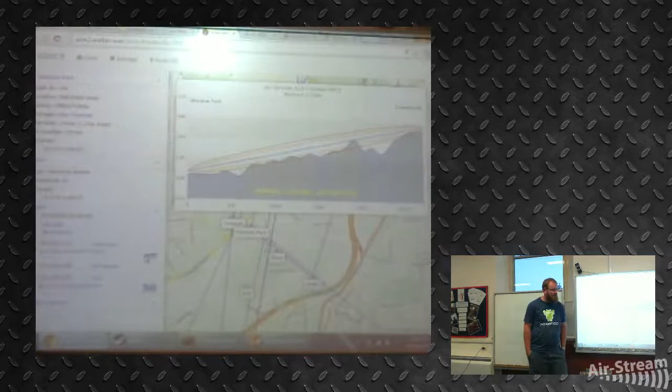So Cement Hill, we've been having a few issues there with a couple of the rockets for quite a while now, so we re-terminated two cables up the top of the tower. Found it's definitely not the cable on one of them - looks like the actual isolation transformer cooked itself in the rocket, but bench testing will confirm that. So we've got another one to swap in there.

What are we looking at? That's Cement Hill, up on top of the hill. Awesome view. How's that link, Hank?

How's that link there? It's not putting my spot - I've got a Lonsdale. This is just some redundant line someone drew in there, never mind that. Looks like you've got line of sight though, Justin, but it's not putting mast height in either. Signal's not that strong, not great. Sorry mate, it's rough.

Are you sure? How dare you do that. Bug report - done. Where's the bug report? I sent you an email.

So it's literally Shadows - Tony's all of about 400 metres from it, he'll have good fun there. And the link to Lonsdale from Cement Hill - still good quality? Yeah, no plane issues, good.

So that's what's happened in the last 2 days. The plan at the moment is to head back to Cement Hill on Monday to swap out that rocket, and that should get our northern 2 gigahertz coverage running properly again.

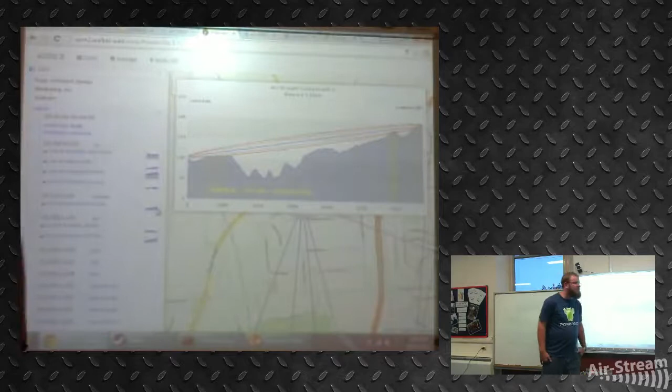What's our Cement Hill link there? The NRC is a good one because it's like 6 metres from the ground when it should be 45. But yeah, that's those ones - awesome, that's a good link.

It's a volcano at the moment - yeah, the lava flowing out.

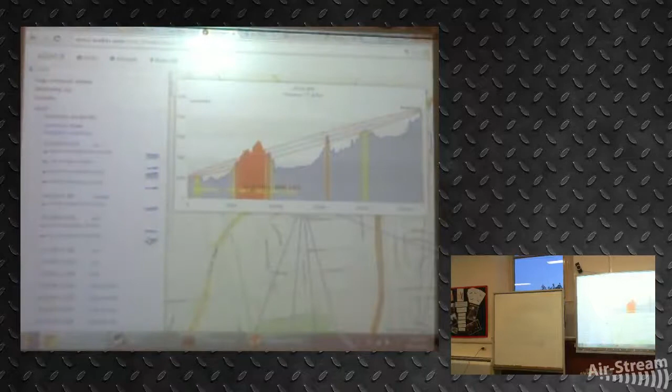Oh okay, so Cement Hill, that's the other one I forgot about - one of the guy wires snapped, and it actually corroded off on the cable.

Can you see that, Sean? Does that come out? Yeah, so the guy wires there use a product called the Anchor Lock Duckbill, and the ones we installed were recommended for the application. However, we grossly underestimated the salinity of the soil there, and 8mm galvanised wire rope has just corroded straight through in 2.5 years - that's why it snapped off. So we're down to 5 wires on that tower now.

That's Cement Hill there. It's mildly awkward to climb when it's on its side like that. But could be easy. What are we looking at? That looks like fibre, doesn't it?

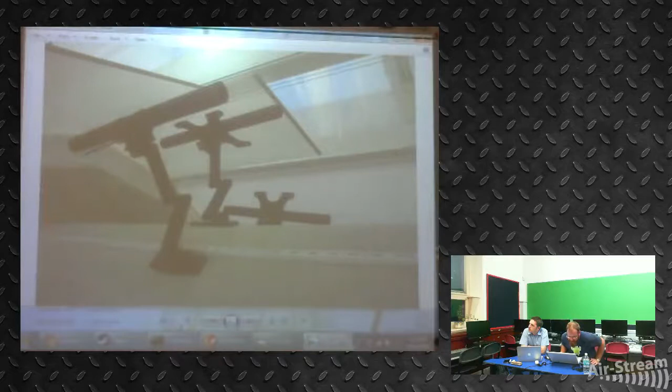Not this, this isn't cement. I'm assuming this is Tonsley. Oh I see, you can rotate it. I don't know how to use these computers.

They've got these things everywhere, they're television mounts, which is fine. It's got like a plastic thing on it. That's all related to where they are. You can put a little board here for us to put gear on, and it's all in the corner, so there's people working here.

So again, for access, it's really good. There's not really a photo I can show you that'll show you line of sight around the building without doing this. Where's that building? This is the Tonsley building.

And that's the network room too, which is great because we've got access to it and a whole bunch of stuff there. That's also probably in the room. So that's all ours, or access for our gear.

You can see where everything's got a sticker on it, that means you can use it. They're going to be using it for their experiments as well, they've got plans for doing 1 gig stuff and whatever. They've already asked us for assistance with that, and I said yeah, there's going to be somebody in the club who'll be able to help you.

So I think it's Bedford Park, Chris, is it? Or that building over here, I didn't know quite where it was. That's still more elevated than I thought. That's like the 4th story, so you can still see pretty good coverage there.

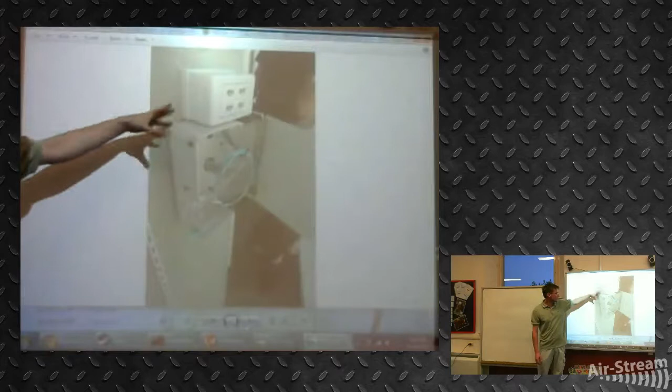Not a picture though. So that's what he's given us there, for like on every floor, and there's 11 of them. There's like a lot. Wow.

So if you look at that and go, how much money is that - we feel pretty lucky to get anything this good. It's good, not having to do any infrastructure or any of that Highgate Park drama we had.

No, you don't have... yeah, I see. Yeah, cabling between the two. Go to the next... sweet, go to the next picture.

Oh yeah, those are concrete, aren't they? Yeah, they're all solid, so that's what holds the building up. They're right through. But like I said, they're distributed not evenly - there'll be like 3 on the 4th floor and then 5 on the other floor.

So it's not like an EARC setup where we've got one floor that's all ours, and we can put wherever we want, 360. It's more scattered where he has control, which is better for us because it means we go, hey Paul, we're having problems with number 10.

He's like, yeah no worries, just give us a call. Having that sort of accessibility is great because then we don't have to get access to the roof and all that. It's also got greater separation. We're not going to be using every one of them.

They're going to be doing their stuff as well - they want to do testing with lasers and all sorts of shit. Use the same frequency on the opposite side of the building then? Well, that'd be the great thing, wouldn't it?

If you can use one channel for all the sectors, it'd be great, but I don't know what they've got at EARC. I think we don't have that. Yeah, but it's good.

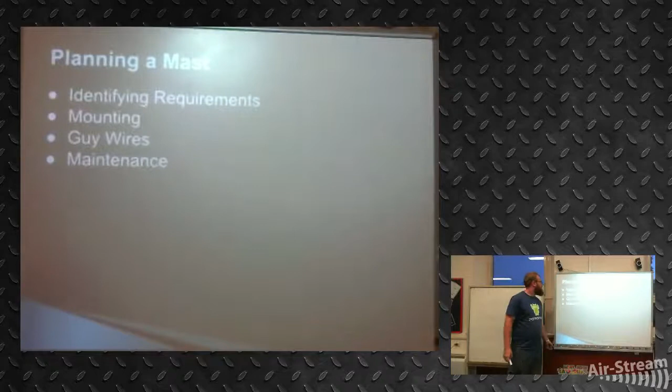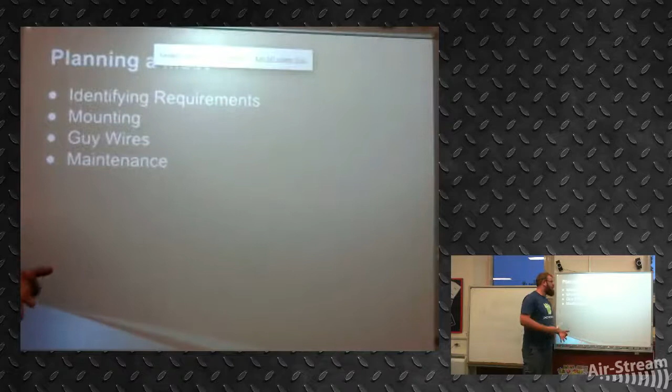So basically what I was going to have a bit of chat about tonight was planning a mast, building a mast, and things you probably should think about when doing a mast. My main points are going to be identifying requirements, mounting, guy wires, and ongoing maintenance. A couple of these things we do without thinking, some of the other ones generally get forgotten.

If we go to the next slide. And it's safe to say, if you want to be on a network team, you need to know this kind of stuff as well. Not to mention doing your own builds. Yeah, it's something every member should know, is how to plan and build a mast properly.

So identifying requirements. This is something that most of these points that I've got up here, we do without thinking, some of which often get overlooked. So: load requirements, accessibility, wind and exposure of the mast, existing infrastructure that you've got to work around, and visual requirements, which is becoming more and more important when planning masts, so the council doesn't send us an angry letter.

I'm going to start off with load requirements and wind and exposure, because it's something that I've done wrong myself. I've broken masts. If it's possible to destroy a mast in a certain way, I've probably done it. Not the best way to learn, but it is a way to learn.

One thing that we're all very good at doing is overloading masts. When planning our builds, the first thing we should be thinking about is how much gear do we want to put up there? How much gear could we possibly want to fiddle with? Are we going to put other things on the mast, like a TV aerial, or a satellite dish hanging off the side? Do we want to put a wind turbine on there as well? Who knows? So load requirements are very important.

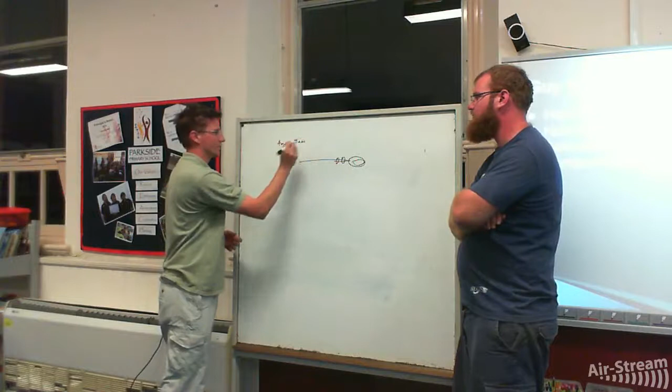A lot of the builds we do, we don't need excessive amounts, and we normally use about 4 to 5 mil rope, which has an FSWR. Yes, we could do FSWR, but that's a whole other theory. The breaking strain of this is fairly high, like it's pretty good stuff - 3 ton or something. So majority of my builds I usually use 4 mil, mainly because it's cost effective - that's the right stuff to use for the job.

The other side of it is if you go too big, you're not going to get the tension on it to keep it straight - it's going to be sagging. So no mast that we'd ever build, you'd never put 10 mil rope on it. It's just silly, it's going to cost you an absolute fortune.

Even the 50 metre masts don't use 10 mil rope - they just use lots of rope. And they work on redundancy, so if we lose 3 wires, will the mast fall over? Right, good, let's double it over again - which gets back to my point that your mast should be able to stand up without wires.

So you've got a couple of parts to the guide wires - I call them guide wires, people call them guy wires, whatever it's called. You've pretty much got your rope, which will come down from your mast. Sorry if I'm going a little bit - I haven't really rehearsed this or anything, but I've just done it 100 times.

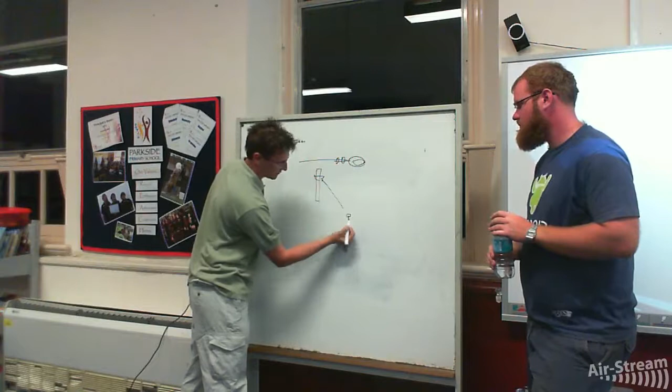You've got your fixed point wherever you're attaching it to - could be the roof, could be a chimney or a tree. I highly recommend not a chimney or a tree - yeah, it's bad, the trees let go. Sometimes you can use them, so chimneys... yeah, so you've got guide wire that goes into.

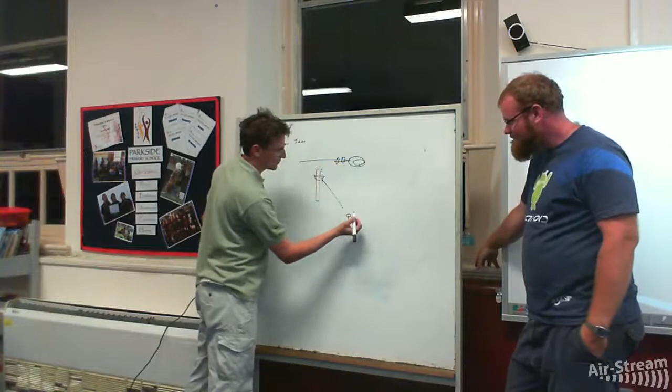So you've got, I'll say I use a piece like what we used on Shoto Park - a piece of angle iron, bolted to the roof, straight into a beam or something, is always a really nice option. It's got a nice D-shackle on it, which means the wire will give you a bit of movement as well, and it's very easy to take off.

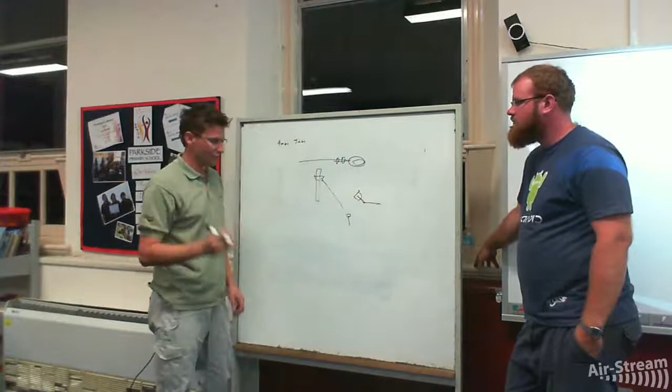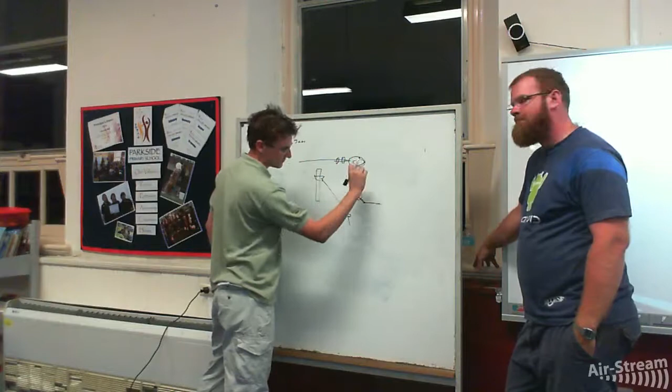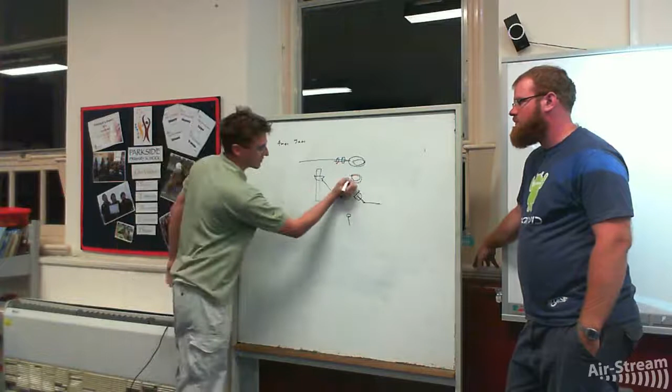And then you've got your eye, and then you've got your thimble inside it, which pretty much keeps the form of the wire regardless of whether it gets tension, and also it's a visual indicator - when you look at it you can see if it's moved, if the thimble has moved in the mount, you can tell if the mast has loosened off.

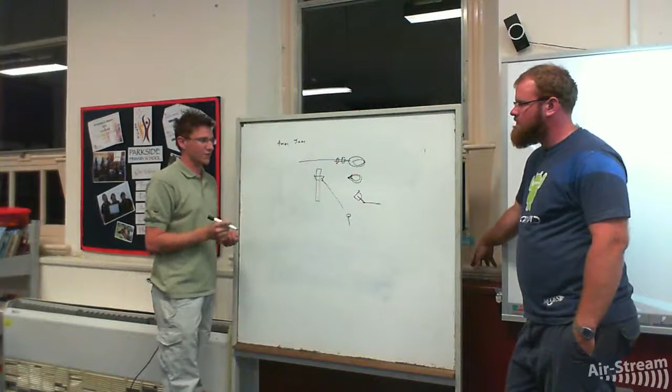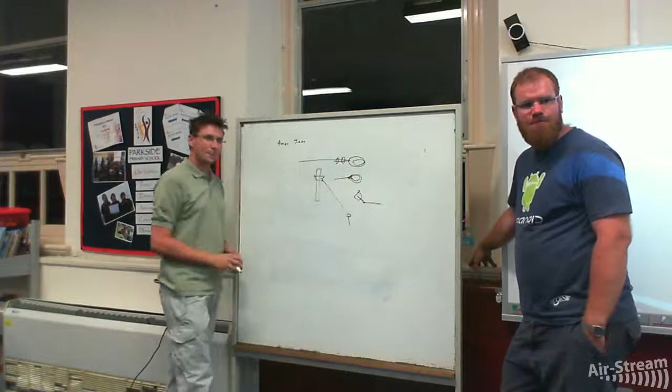So it's also really good, especially with the wire rope we're using - it's not very thick, so it has a tendency to bird cage and even break. So it's always a good idea to put a thimble in. It also keeps a nice curve on the wire, so you don't have a sharp edge where you're attaching it, catching all over your hands. And if you need to adjust the wire later, a sharp edge will wear through it quicker.

So you've got the eye, and then you've also got your turnbuckle, which is a bit like this. There are a couple of different ways of attaching to turnbuckles. Some people like to go directly onto the turnbuckle, putting the thimble through it and attaching like that. Personally, I like to use a D-shackle, but it's each to their own.

What I usually do is wind these right out - go all the way out until you can literally see a little bit of thread sticking out, probably only one or two. If you've got M8s or M6s, there's plenty of thread on there for whatever you're going to do.

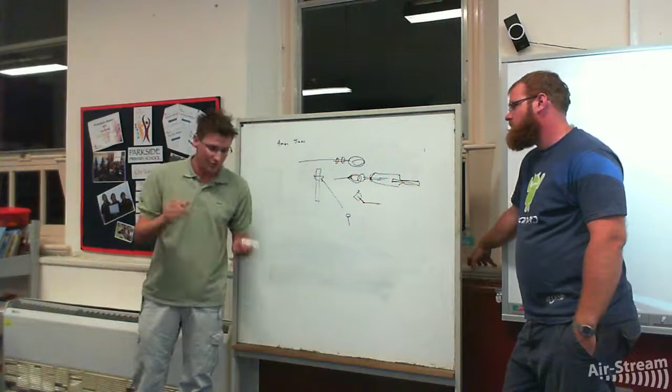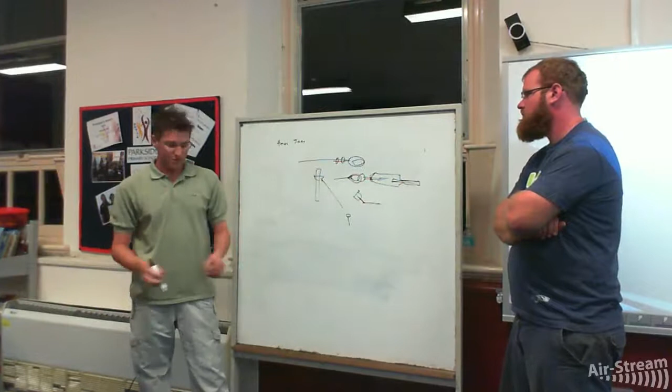That means when you've got your wire there, you know where they're all set to, and when you start turning you've got a lot of movement, so you can go 'oh shit, we really stuffed this up, I've got to pull this one in and this one can stay out' or whatever. You get yourself a lot of movement, and right at the end when I'm finished, I'll use a spanner and just put a couple of turns on it, and it will not move. You can go up there in 2 months' time and check it again - that's the whole rule of thumb for how tight it needs to be. You'll pick that up from other members and stuff.

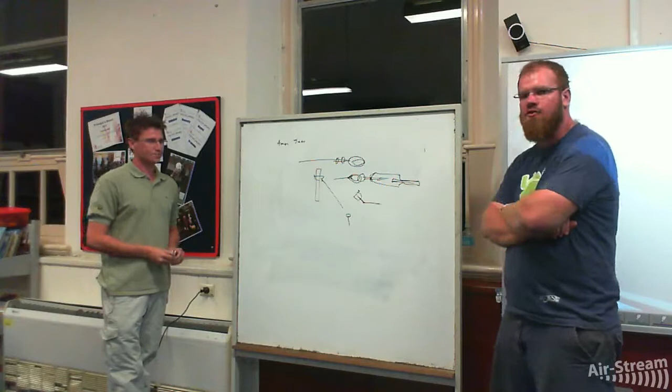Everyone's got their own take on how that should be. Personally, it depends on what you've got up there - some sites you want a little bit of movement, depending on what's there, how many wires and how many sets you've got and everything.

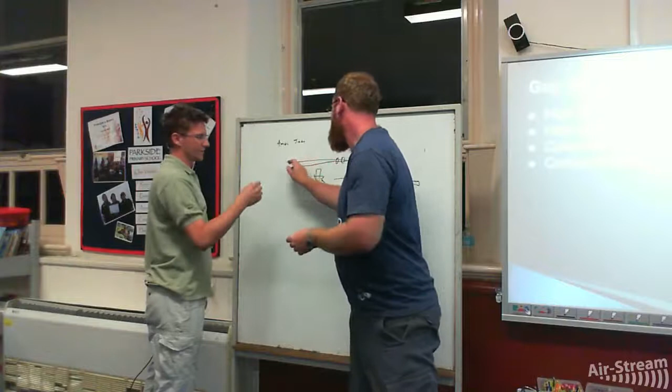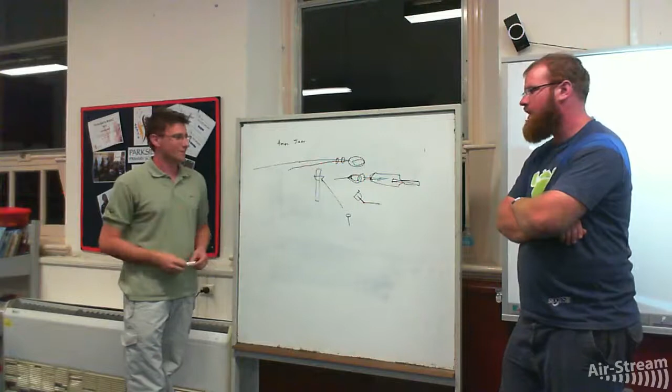Next, moving on to this - these are your wire rope grips. We normally use, you really should use two. I've seen sites where they use one, but obviously the second one's there for redundancy. It's designed so that it doesn't slip - the wire's... if you read the Hills manual, they'll tell you to use two.

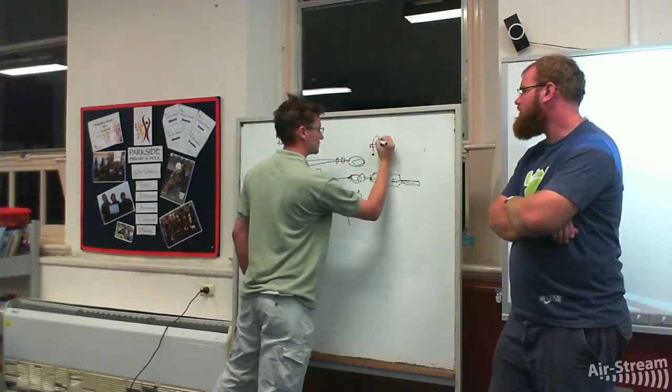It's a little bit like this - it looks a little bit like a tiny U-bolt, with a nice little saddle. I think at Undo we use 3. Yeah, I've used 3 on my tower, I've got 3 on each wire.

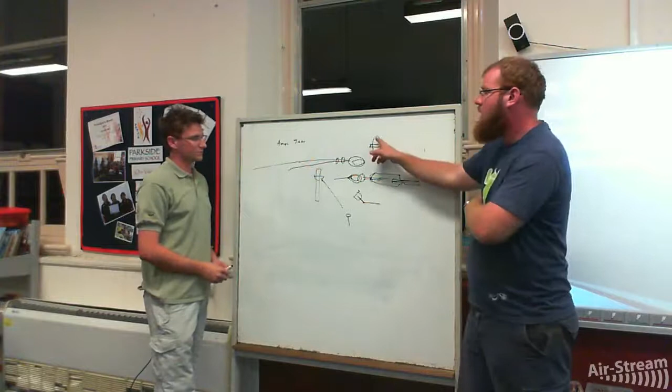Now the other thing, I'll get it backwards - these only go on one way. Are those called D-shackles? No, they're your wire rope grips, and they only go one way. Google it, I don't actually know which way it is - I get it wrong every single time too. I've even seen riggers at my job, riggers more senior than me, flip them the opposite way, so it's sort of one way or the other.

Yeah, they're doing different things than us, but they know better than what I do. But what we do here, I would suggest you put them the same way.

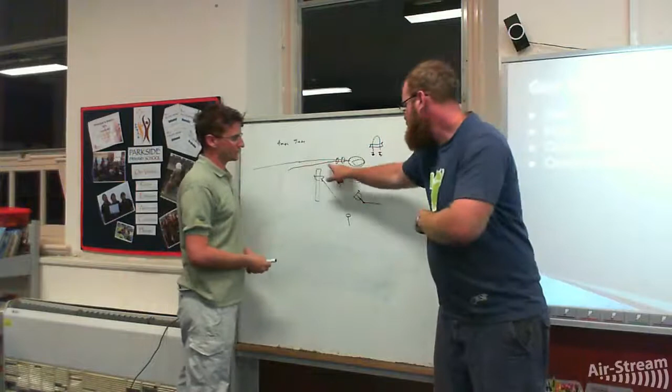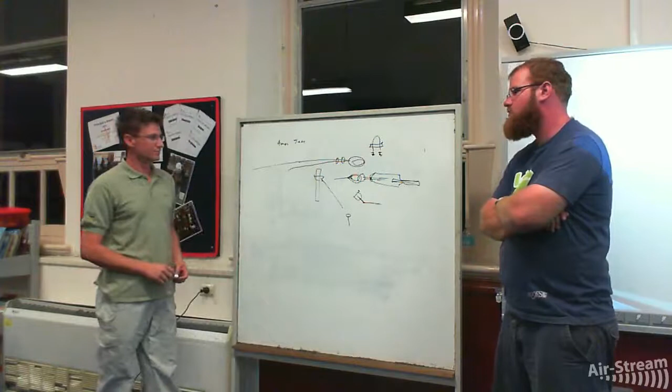Off the top of my head, I'm pretty sure the bolts need to go on this side of the wire. Bolts go on the ends, not clamped down on the spare, not on the ends of the cut. You know you have a short end and a long end, so your bolts are here, and this is the extra part.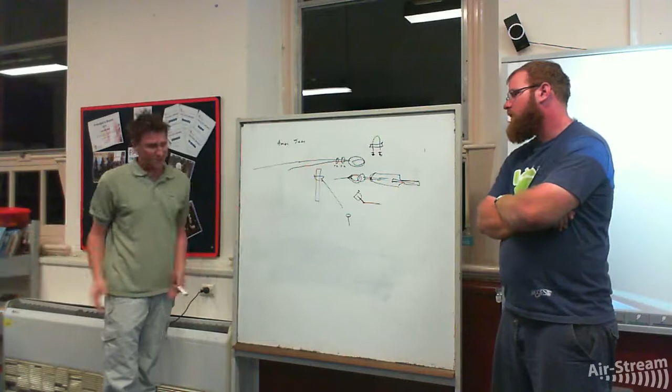I always give myself, if this is the bottom part of the wire rope, at least a couple of turns extra. You've got your 2 meters there, it's not really necessary to cut it, if you need to change it later or have to change the position of the collar.

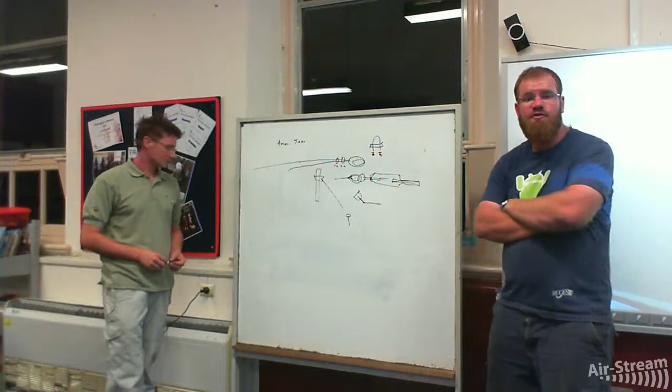It'll come back to bite you on some sites where you can't do that, especially if the visual side of it matters. If it's going to be in full view of the world, they don't want a nice big coil of wire rope there. Make sure you've got at least half a metre extra.

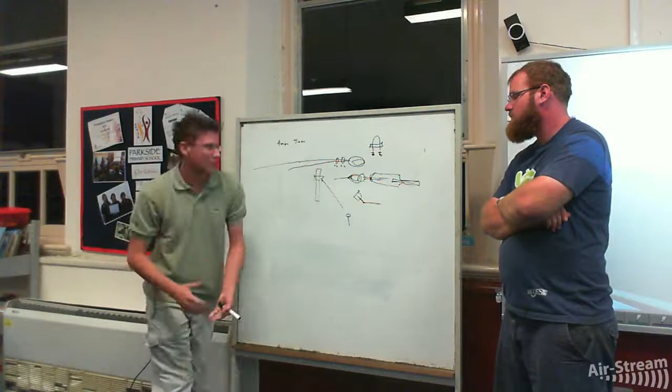It also helps if you need to reset the wire - if something's happened, you've got something to grab hold of. Someone with gloves has a metre to pull up, or someone else is tightening it, so you haven't got this little section where you're trying to hold it and do all sorts of things on a roof, where things can go wrong. So it's always good to leave yourself a little bit.

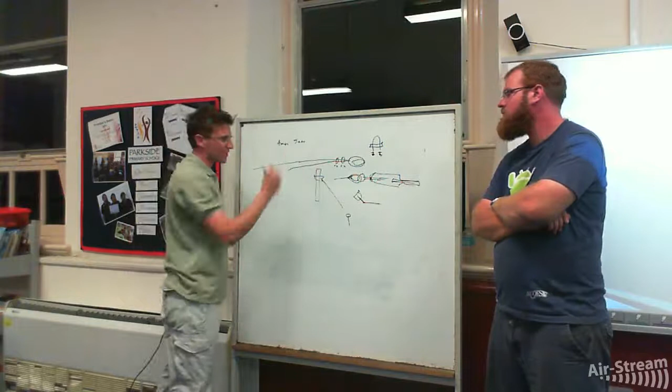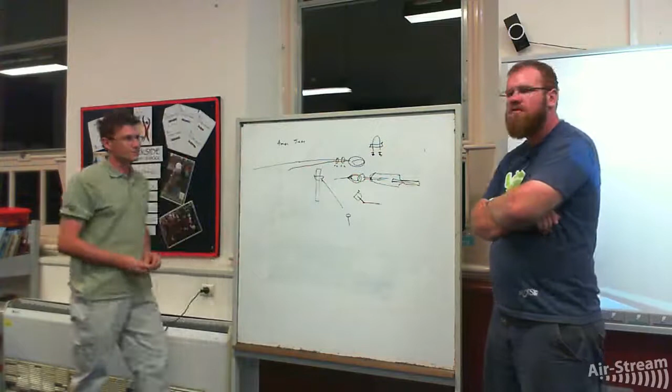Just tape it up, put a cable tie on it, so it's there, ready to go if you need to move it. Like I said, measure twice, always cut extra, always cover these two. It's not expensive, at 30 to 60 cents a metre, just chuck in extra - you've already come that far, so the last thing you want to do is go down to Hills or Nobles and grab more.

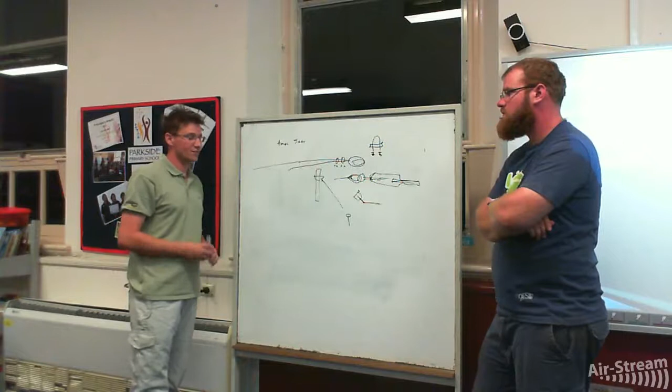That's just annoying. I really suggest everyone not go to Bunnings. You will get shafted on price, and they don't always have the right stuff. The majority of the gear they've got at Bunnings is not rated for lifting - we're not really lifting, but we are working with the same sort of weights.

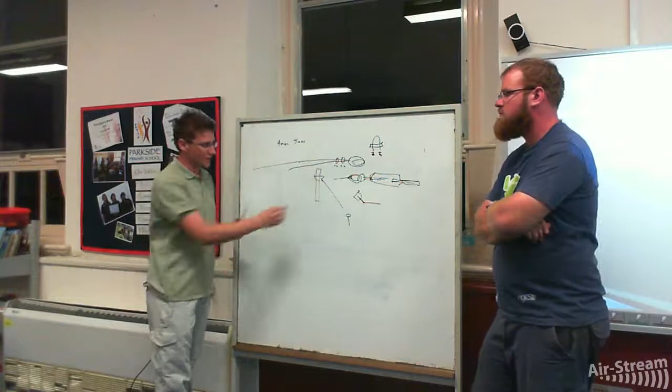As Nick said, quality of the components as well - generally your wire rope grips are a lower quality, and the D-shackles and the stuff they sell is for shade sails and things like that. I'm sure you can tell me stories about someone's shade sail that flipped over. I sleep very well at night knowing that when I do a site, I put the right gear on it and I can go up to the mast and shake the crap out of it and it doesn't move - that's fine, it's not going anywhere.

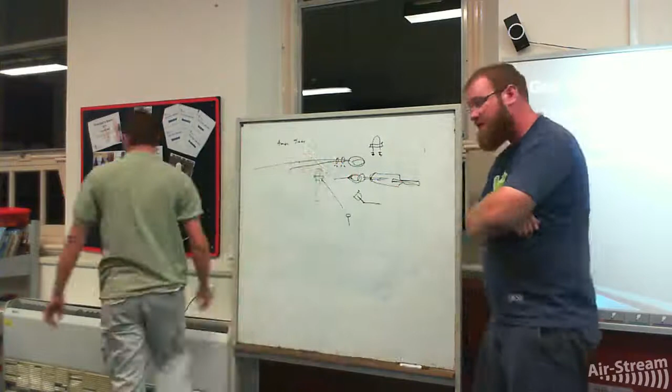Do they do the Ramsey gear? I don't know, because the only thing I buy from Bunnings is aluminium and brackets. I'd go to Capral for that, it's half the price. I just get like a 1.5 metre length for the angle, but it only does half the price.

There's Nobles open - I think they're open Saturday morning, and if not, they open early as well. I think they open at about 7:30. They're on Grand Junction Road, huge big warehouse, shiny, it's blue, it's new.

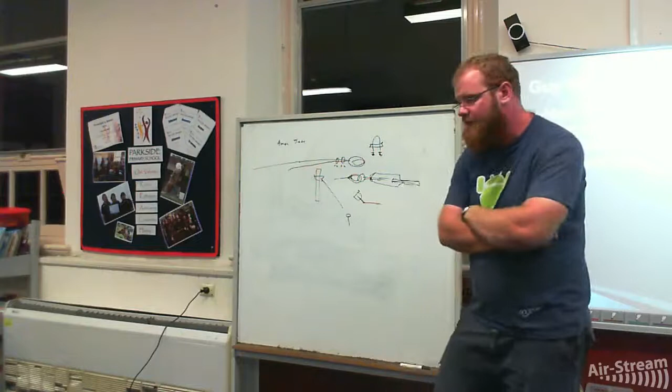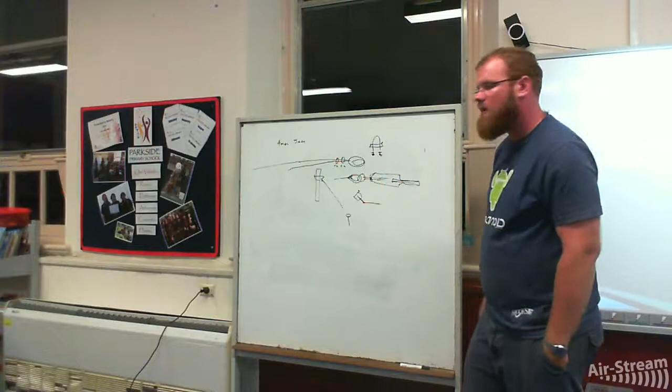So yeah, that's wire ropes. Always buy extras, because I guarantee you the nuts for your thimbles, you're going to lose half of them. You take it off, it falls into a gutter, it falls down a drain, you'll lose bits. Buy extras, they're dirt cheap. You're talking 10 cents each for thimbles like that. With our member discounts, rated D-shackles, M8 D-shackles are about 30 cents each.

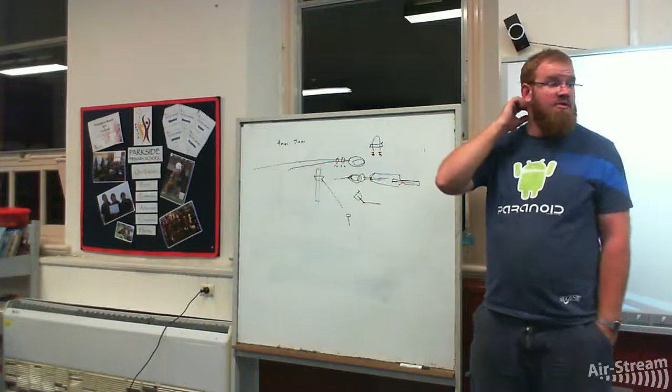Do those have Nylocs? No, they don't have Nylocs. Please get 10 extra, they've got a cast bit on them so they actually bite in. I haven't seen them, I've never put Nyloc on them. Could if you really wanted to. I don't think you need to. I never have.

Yeah, that's it. It's just a pain if you need to reset them. I haven't seen any, I've never seen wire rope grip nuts come loose, not when they've been done up with an actual spanner anyway. If anything, I've seen it lead to a point where you can't undo them. Exactly, they normally corrode up. That's only in extreme cases. They normally corrode up and you can't get them off anyway.

The last pro tip I've got for you, when you cut wire rope, the grinder is a very handy thing. However, put some tape around the rope first, that way you don't get the nice frayed edges and cut the shit out of your hands. Tape it, cut it through the tape. It smells funny, probably don't breathe it, but it's the quickest, easiest, cleanest way to cut wire rope. You're not going to end up stabbing yourself. Leave the tape on there as well.

That's a pro tip. That's one of the life hacks. Yeah, make sure when you cut the wire rope, you cut the bit you meant to cut off, not the wrong side. That's also really annoying.

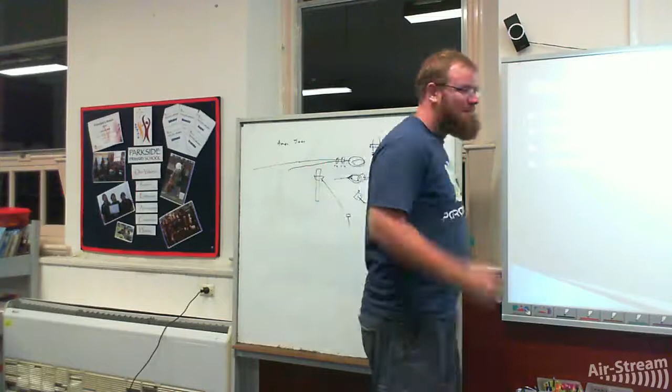Battery powered grinder is your best friend as well, if you've got one. Otherwise a normal grinder. Side cutters, don't do it. If you're rich and doing this all the time, buy wire rope cutters, they're about 60, 70 bucks for a pair. They cut like a hot knife through butter, they're brilliant. They really are. They're razor sharp though, they'll take your finger off.

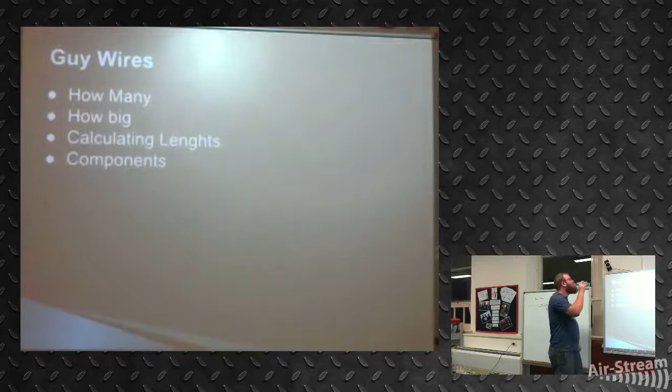Maintenance. This is the one that always gets forgotten. How do we actually access that radio that's died on our mast? Yes, we don't want to admit that things are going to die, but they die. Everything dies eventually, it's a fact of life. Lightning.

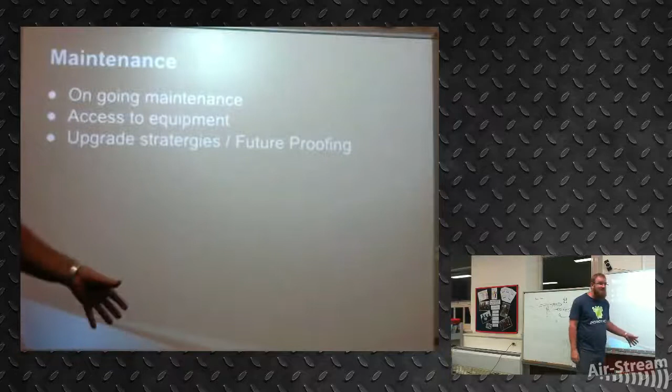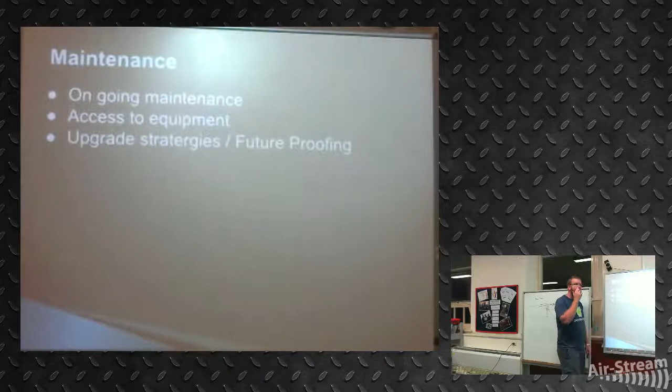Lightning's a fun one. I recently had one of my towers hit by lightning in WA. I had 4 Motorola radios die on that and 1 Ubiquiti radio die on it. The only stuff that survived was Ubiquiti gear, amazingly. None of the $1,000 radios survived. The only way to get up this mast is with a 27 metre EWP, which I had to drive, because they wouldn't give me a low loader, about 8 kilometres, at all of 1 kilometre an hour. It is painful, and every time a vehicle went past I had to pull over.

So, thinking about how you're going to maintain a mast. In this example, if I were to build a new mast at this site, I would put something up that I can tilt over, because it's going to get hit by lightning again. Something I haven't even gone through is lightning protection and all that sort of stuff. We'll make it fun. Yeah, so how are you going to access it?

Larger sites, if you can, climbable masts are really great. They are also really expensive, but they're awesome. Not always practical. Tello masts are probably the most practical one for a client install. So if you're just putting up an Omni and a NanoBridge or a single antenna, a Tello mast is the way to go. They collapse down, you undo the bolts, they come down to about 5 metres, you can access your equipment with an A-frame ladder. Except for in-roof ones. Don't put a Tello mast in your roof. Yeah, don't put a Tello mast on a tile roof, because it'll leak like a sieve. Another one, I know we've all done it before.

We've all done it before, but you should never ever lean a ladder up against a mast. Cook and I have got a really good story about that, we'll tell you it later when the cameras aren't on. So never ever lean a ladder up against a mast, it's just not safe, it's not stable.

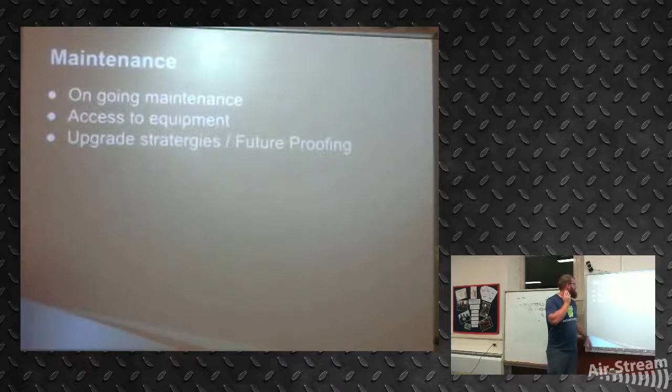Where possible, you want to bring the gear down to you. It may be a requirement that you need to get an EWP in, boom lift, scissor lift, whatever. Cook's got a mast that's like that. Unfortunately it gets expensive, but you need to think about access to your equipment and ongoing maintenance, those sorts of things.

I've already spoken about upgrade strategies and future-proofing, so I'm not going to go through that again. Over-engineer, and think about how you're actually going to get to your equipment when it dies, it's not if it dies, it's when it dies. Everything dies. I've currently got 2 radios dead on my mast, one of them's been dead for 2 years now, but one day I'll get up there. I'm not all that interested in it at the moment. Clearly it's not that important because no one's noticed. But have a think about how you're going to get to your gear.

Half of this comes back to maintenance as well. Accessing your equipment also directly ties into how you're going to get it up there in the first place. If it's a saga to get it up there, it's going to be a saga to get it down. So it's something we always need to think about, but we don't often think about it.

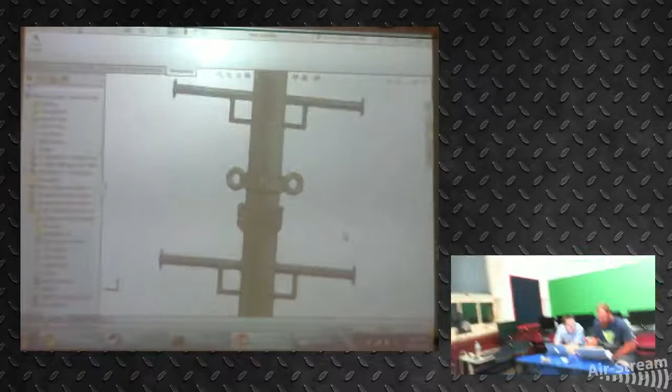But yeah, that's the little bits that I've got. One little thing I'm going to show you - I'm a massive nerd and have no life, so on the weekends I like to design things that I'll probably never build. Except this one, this one's actually going to get built.

At the moment I'm designing a climbable 10 metre monopole mast for a good friend, with a nice lightning rod on it. Don't ask me how long it took me to work out how to bend bar in this program, it was not fun.

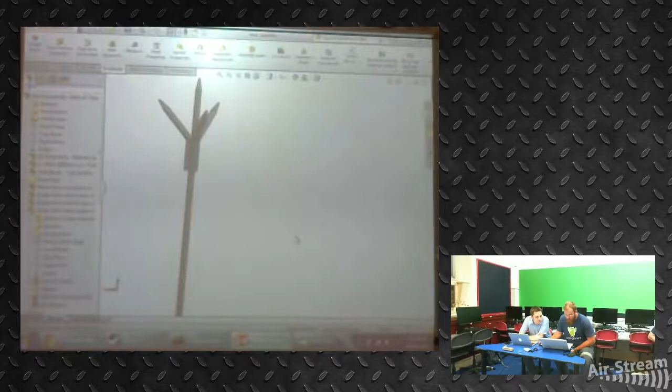But this is a little one I've been working on. It took me about 18 hours of designing this mast, down to the point of doing things like - oh, that was the wrong side because I haven't put nuts on that - down to the point of putting in welds, defining welds, cut profiles.

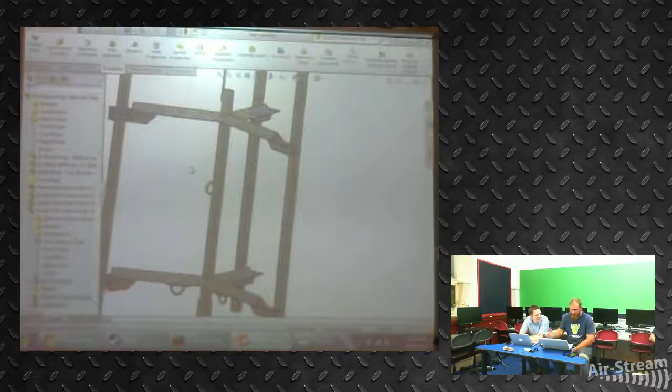Texturing the steel, that's nice too, there's photo renders online. Can you load it up with a ton of equipment now and see what happens? I put some 36dBs on there just as a test. I just got the simulation licenses as well, so I haven't yet done the simulations on this. But when I was designing this, I was thinking I'd do some 36dB CAD drawings - yeah, good luck with that, parabolic curves are really painful.

So when I was designing this, I was thinking about what are common materials, and how do I minimize wastage in building this mast. This mast is going to be expensive, it's going to cost about $1,000 to build.

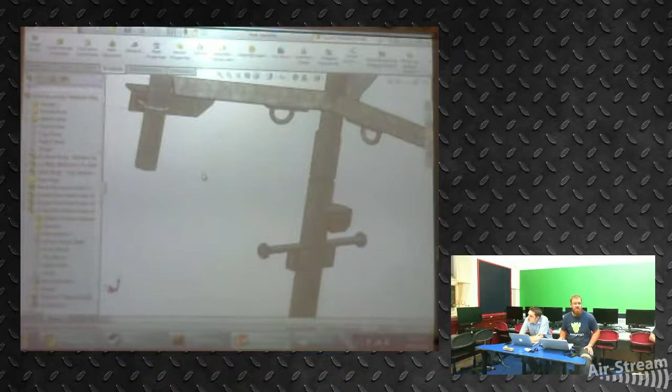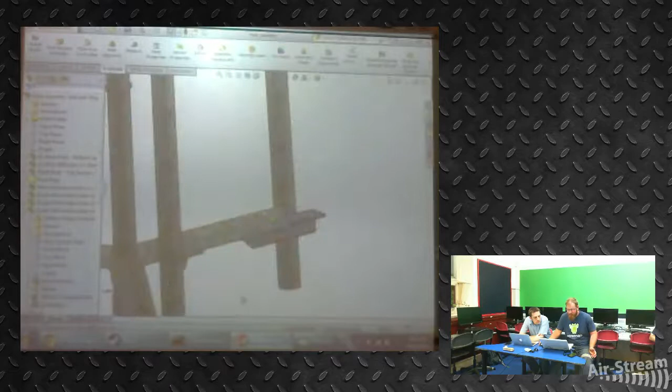So I'm using common materials, things that are readily available, and there are common sizes throughout this entire mast. That's why some of these pieces are massively oversized - these braces are actually the exact same size as the actual standoffs for the mast that go out to the outriggers. But that's a standard material you're already purchasing, and when you buy that material it comes in a 7.5 metre length. So rather than buying a length of this size and only using a metre of it, I've used common sizes.

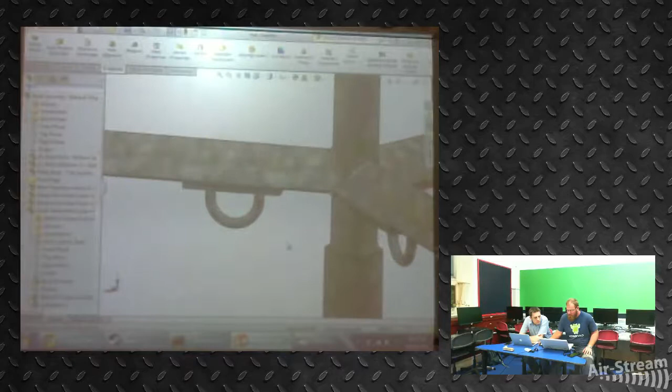Same with things like rod and the actual round bar. There's 3 lengths of water pipe - actually steam pipe I've spec'd for this one, nice heavy wall. Estimated cost - I haven't done the numbers, but I'm expecting about $1,000. And how tall is it? This one's 10 metres.

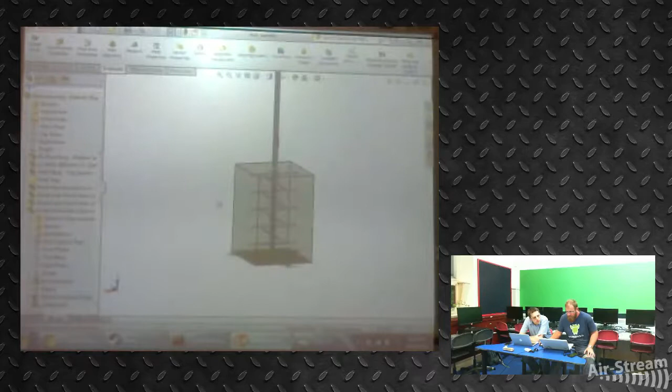10 metres, so how much is under the ground? Yep, there's 1.4 tonnes under the ground. I can't remember the exact dimensions, but I think it's 800 by 800 by about a metre deep.

The grey concrete box is concrete, about a metre. Does it have wires or is it freestanding? No, this is a guyed mast.

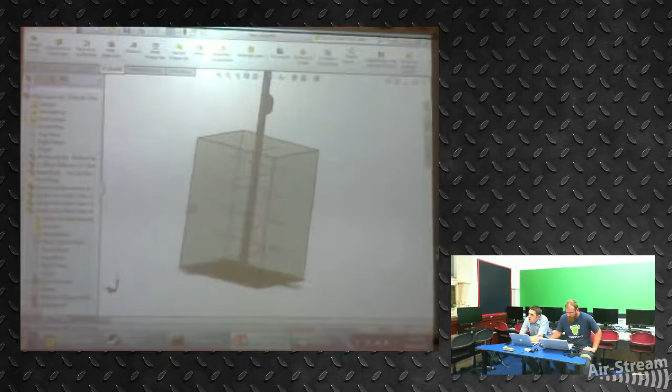This one has a set of wires that comes back to my rule of thumb: first set's at 6 metres, then every 3 metres after that. So you'll see somewhere here - I can't see a thing at the moment - yeah, there we go, there's a guy wire mount right there.

So there's our ring that we're going to hook our wire rope onto. That's on the back.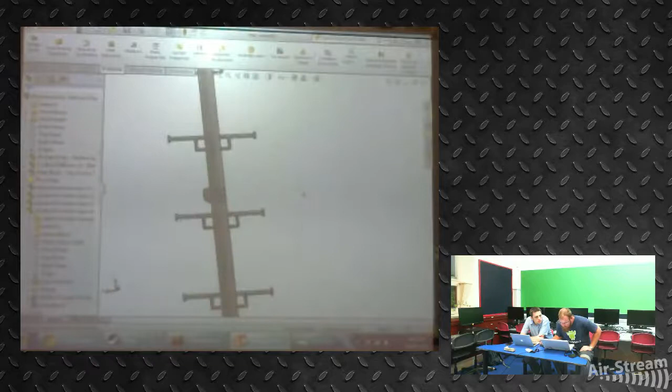That's going to take a month just to get the metal together. Yeah, it's going to take Mazza at least a month to cut the metal up for this. But the fun part is we're not paying for labour.

Cable management is always one that we don't really think about. 99 times out of 100 we just cable tie cables down the side of the mast. Some sites it's alright, some sites it looks like rubbish. We're building a shiny mast, let's put some cable management in there anyway - got a shiny cable management or a shiny mast.

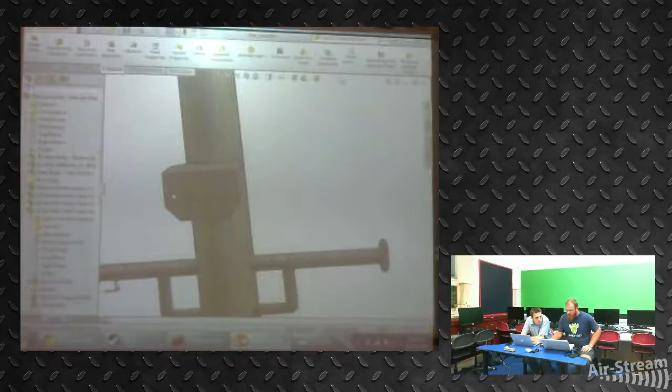I haven't yet run all the simulations on the load requirements of the foot pegs and things like that. Off the top of my head, I think I chose 16 or 18mm spring steel for the rods because it's actually quite cost effective. The round bits on the end are washers - they're only there to stop your foot falling off.

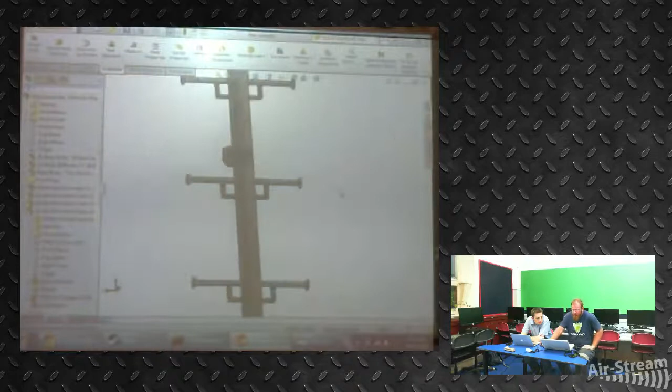So common materials is what I've gone with here - plasma cutter, welder. No, I've actually done this, so you don't need a plasma cutter now. The other thing I was thinking about when I was designing this is what equipment have we got access to actually do it.

This one will require a crane to put up - there's no way you'd ever stand it up on its end. Off the top, what is it - somewhere there it'll tell you the weight of it. 672 kilos at the top.

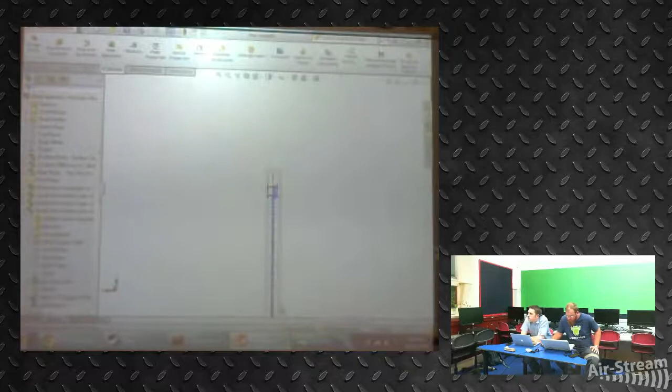Oh, that's including the concrete. That's not right. 672, yeah okay, that's including the concrete, so about 100 kilos. All the material properties are in this as well. Without the concrete it'd be about - I must have done 80 kilos.

I must have done something wrong with the material in that concrete sort of muck.

Has a shadow as well? Yeah, 182 kilos for that, sounds right, for the mast.

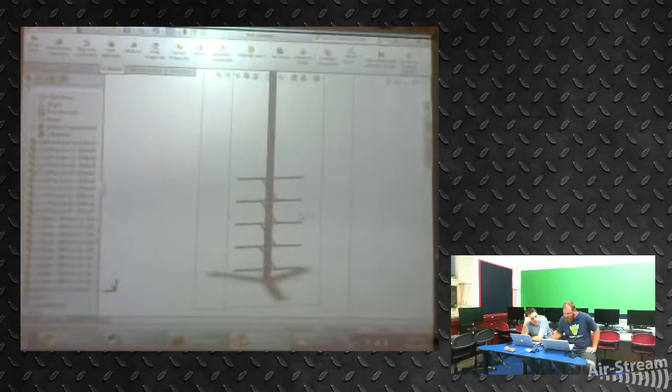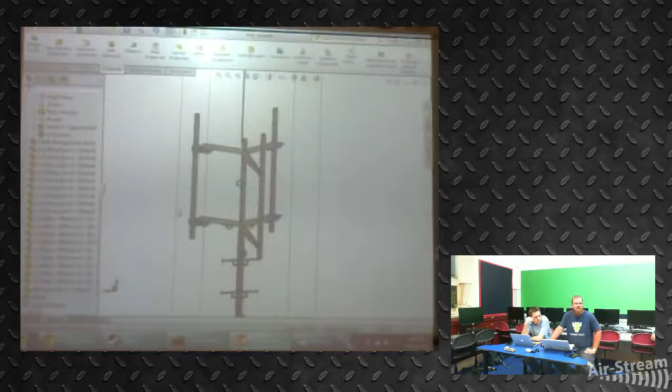This is basically - I 3D model everything that I build. Everything that I've ever built, I've 3D modeled, pretty much, because I have no life.

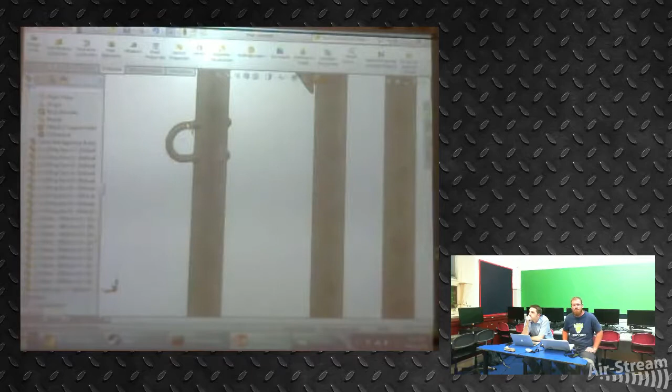Have you got somewhere to attach your harness onto when you're up? Sure do, see that ring right there? Yeah, rated at 1.5 tonnes continuous. It's rated at about 15 kilonewtons impact. So you can hook your harness on there as you're climbing it.

The intention is you use a parrot or a shark hook over the outer diameter of the mast. You don't go onto a foot peg because it can fall off the end, so you go over a rigid structure - yes, that's what that ring up the top was.

These ones under here are the top guy wire mounts, so we get it out far enough to clear the foot pegs. The ones further down will clear them anyway because I've got them offset. This mast, I think, has got 3 sets of guy wires on it.

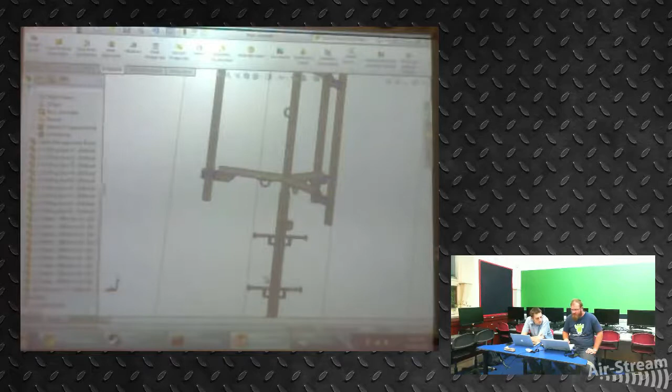Last night I redesigned the actual guide wire mounts for them. I haven't got them in this computer, but they're all on my work computer at the moment. But yeah, that's one of the ones that I've done.

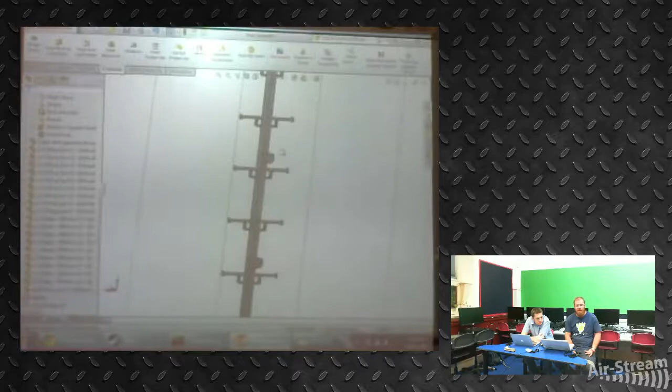Recently, we've used the same method when we designed the new mounts for the Elizabeth Water Tower, because the council wanted to see that yes, they are fit for purpose and can handle the loads we're putting on them. Those designs had load reports and things like that as well - they were designed to handle 600 kilos of force, which is massively over what we'd ever do.